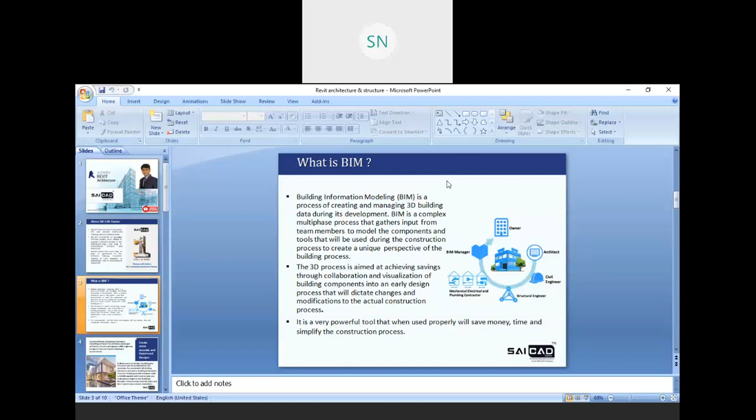And Setu sir, sorry to interrupt you, your screen is not visible. I have shared it. Is it visible, students, or is it not visible to me only? Yeah, now it is visible. Yes, okay, now it is visible, Setu sir. Okay, I have shared it again.

So we are discussing BIM. BIM means Building Information Modeling, right? It actually contains so many - it's a very complex process where so many people are going to work together from different fields. So the process is actually very simple.

Whenever you are going to start your construction project, the first step, as in this image, we have the architectural phase. First we need to create some concept drawings, right? That we can create with the help of AutoCAD. Then the model - that is our architectural model where everything is there with the interior, exterior design, furniture and all, right? Once that model is created, all the data is going to transfer to the next civil engineer.

Then the civil engineer will check the land, right? He will do soil testing, then leveling, and also create a report of the site, right? Then both things - the site report and also the model information - are going to transfer to the next engineer, which is our structural engineer, right?

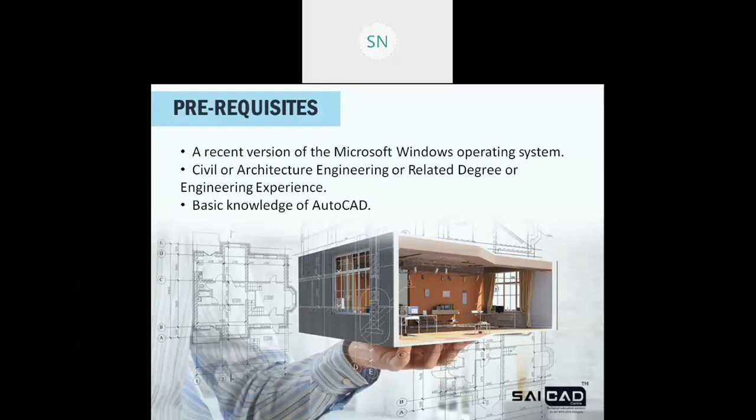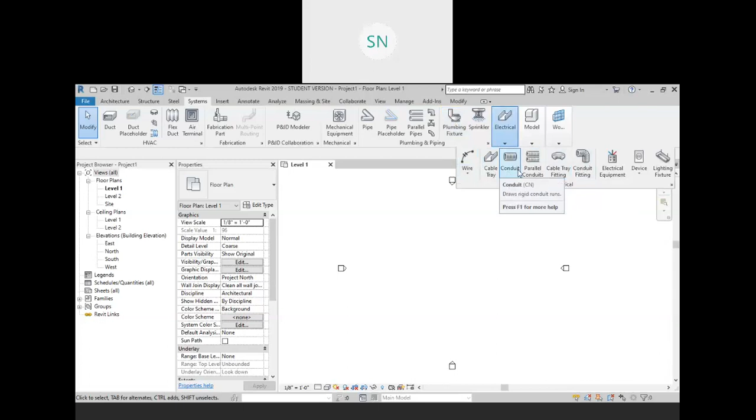One is your supply and return, and the second one is your fire safety system. So these are the sprinklers for the fire safety system, and these are our sanitary equipments, fixtures. Then next we have electrical system where we have wires, cable tray, conduits, and some electrical equipments, devices, and lighting equipments. So this is our MEP system.

But let me close this and continue with the structural analysis default template. So I'm going to use this template, and we will create one structure with the help of grid lines.

So whenever we create a grid line, why do we create grid lines? For proper column placement, right? So first of all I'm going to the south elevation to create a couple of levels.

Let me create levels. Click on the level, choose the pick line tool, and I'm going to create a level at 10 feet offset from here, and one more level at 3 feet offset from below. So these are my levels. You can rename it also - just click on that, and let me say this is my bottom of foundation.

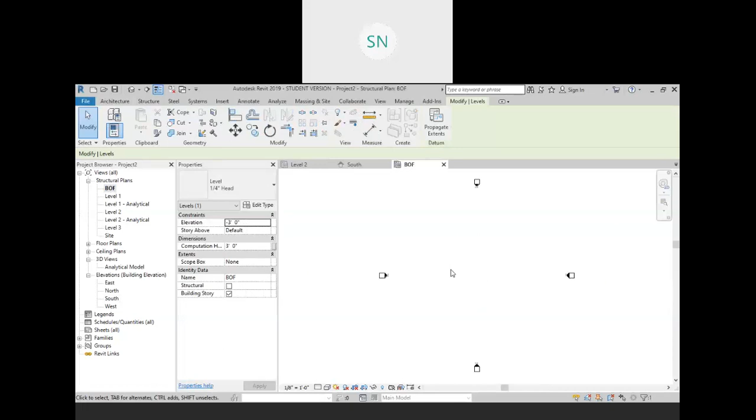And now I want to create a column from my bottom of foundation to a certain height. So I'm going to the bottom of foundation level, and now first we will create grid lines.

So click on the grid line in the datum, and let me create one first. So like level, you can create a grid line also. You must have some basic idea about Revit architecture software, then it will be easier for you to understand this.

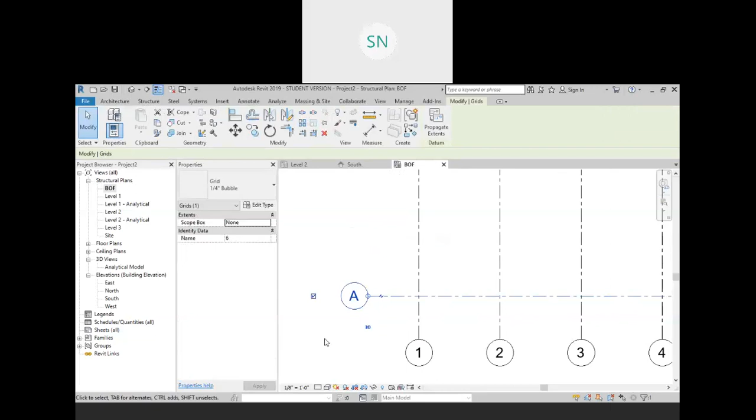Now let me create one more grid line, that is our horizontal one, like this. Before I create an array for that, what I want to do is change the name, type A over there - so this is my alphabetical name. Now I'm going to select it, click on the array tool, and on the other side the gap I want is 10 feet, and the number of copies I want is 6.

So these are the grids we have. Now just adjust this thing - ungroup, set it properly so everything is clear, and try to keep everything in the center.

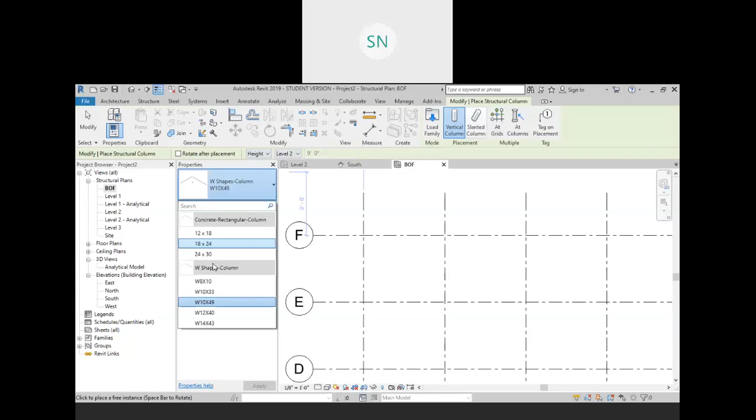Okay, now how to place a column. For the column placement we have a couple of options in this software. Go to the column and see, these are the options we have: vertical, slant, at column, also we have grid. So once you are with vertical, choose your height or depth, let's say height up to level 2. So this is my destination, and this is the size - these are the I sections we have.

And I'm going to create it somewhere over here, and see, it's an I section, but it's not clearly visible. So what you need to do is change your detail level to fine, so the cross section will be clearly visible.

Now see, actually you can place your column everywhere - it is not necessary to place it properly over there, but once you have a grid line you can actually snap it. So the snapping will be there. You can directly snap that corner - see, both grid lines are highlighting. Then just click over there and your column will be there.

Also next, before we continue, let me view it from the 3D. So these are the two columns we have, right? It's a steel structure column.

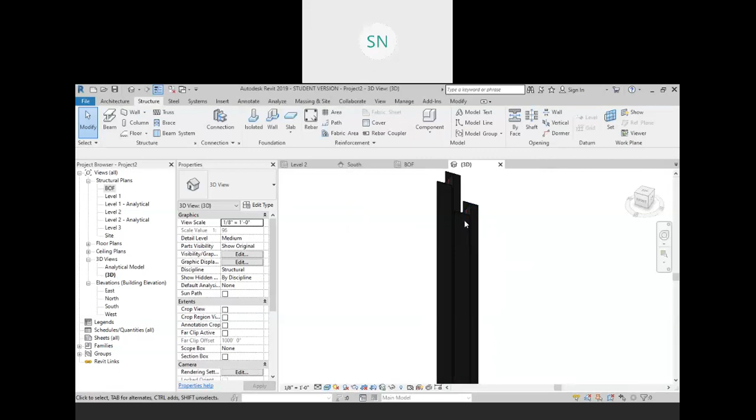Okay, and they are from bottom of foundation to level 2. Go to the south and see, the height of this is from my bottom of foundation to the level 2, right? Also we have slant column.

Let me show you. For example, from level 1 I want to create that. So I am going to create a column. Click on the slant column. The first click I want, the second click on level 2, and first click on level 1, right? So for this slant column you need to create a click twice, your first click and your second click.

So the first click will be on level 1 and the second one will be on level 2. Now this is my first click, so that will be on level 1, and here I am going to click second. So this is my level 2. A column base level offset, top level offset. What is the error? Okay, that is not created.

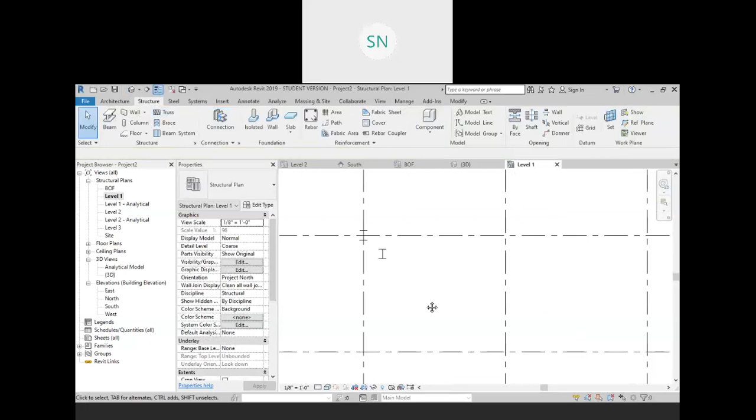No problem. We will create over here column, slant column from level 1 to level 2, first click and the second click, and that is created, right?

Now go to the 3D view and just orbit it. You will notice that it is between your level 1 to level 2, and actually it is a slant column. Go to the south elevation to understand that properly. See, it is from here to here, right?

So these are the column placement options we have. Let me delete them and let me create our structure, RCC structure. For that I am going to the bottom of foundation, and first of all I want to create column. So click on column, choose your size. For example, 18 cross 24 inch I want, right?

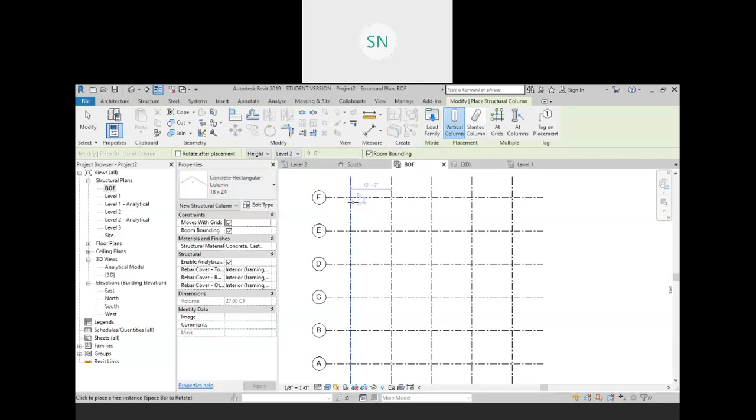Now as I told you, you need to choose your height. Go to the vertical up to level 2, and we have one more option. I want to create multiple columns over here. So click on the at grids and select your grid. It will place columns automatically wherever you have intersection of your grid. See, like this, right? Then just finish it.

So these are the columns we have directly from my bottom of foundation to my level 2, right? So actually we create an entire array of this.

Now for example, a couple of columns I want to take it up to the level 3. So let's have a look which are the columns we want. So I want to take these columns and also these columns. So this much columns I want to take up to level 3. So the top level should be 3. Click on apply.

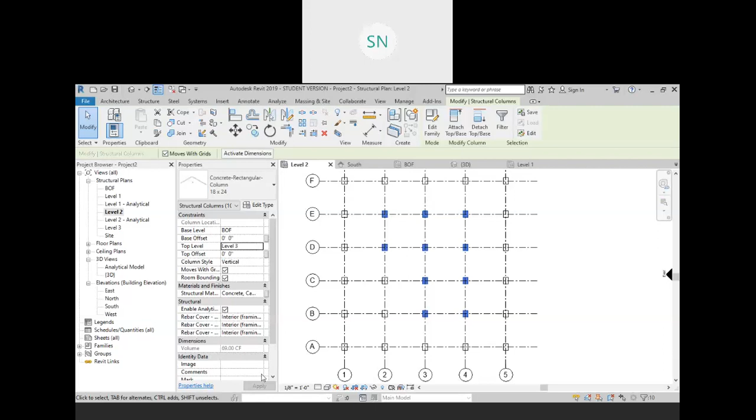And now go to the 3D view. Now see that columns are up to level 3.

Now let me create some beams for that. So on level 2 I want to create couple of beams. So just go to the beam, choose your size. If you want to create your custom one, you can, right? For example, I want to create it.

Click on the duplicate, and I want a 15 by 24. Then hit OK, and the B value should be 1 feet 3 inches, and the height should be 2 feet, which is fine. Okay, so this is my new beam, and let me create that from here to here.

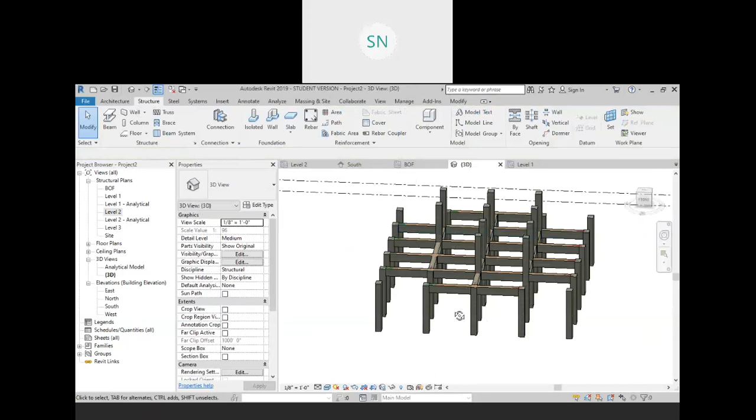You can do copy paste also if you want. Okay, so we create this much beams for our structure. Go to the 3D view. See, these are the connections we have created.

Same for the top. I want to create two vertical and one horizontal over there. So go to the level 3, and here I want to connect beam, I will choose smaller size for now, from here to here, from here to here, and one from here.

Okay, so these are the beams actually are necessary for my structure. So we create that much. Now finish it and go to the 3D. So you get the idea about how to create columns and beams, right? If you go to the analytical model, everything will be in a wireframe mode, right?

So now I'm going to create a floor. So let me create that. Go to the level 2. Here I want to create a floor. So click on the floor, and this is our floor with a metal deck, means it's a steel floor.

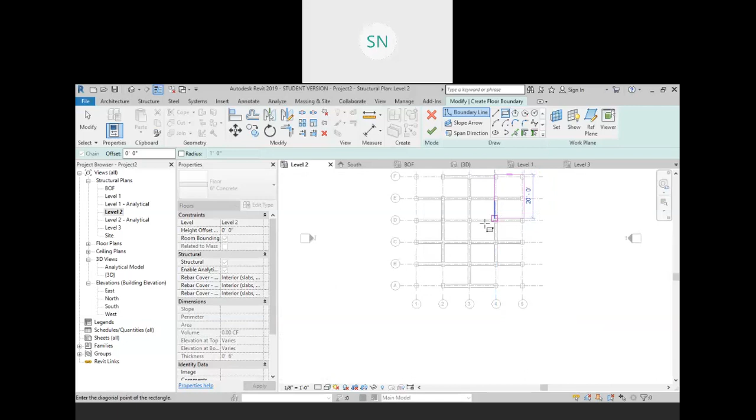I want to create a concrete floor, 6-inch concrete. So click on that, and now create it like this from here to here. Finish that, and this is my 6-inch floor.

We have concrete. Now go to the analytical model. See, we have floor also in the analytical model is mainly used for the wireframe purpose, right? So whenever you are going to analyze your structure, you need this type of analytical model. That 3D model is not useful for the analysis purpose.

This type of wireframe model you need there. So that is your analytical model, but for now it is not useful for us, so just leave it.

Now we will create one more floor on level 3. So again click on the floor, 6-inch. This time I will use this pick line tool, and I want an offset of 5 feet on every side. We will take.

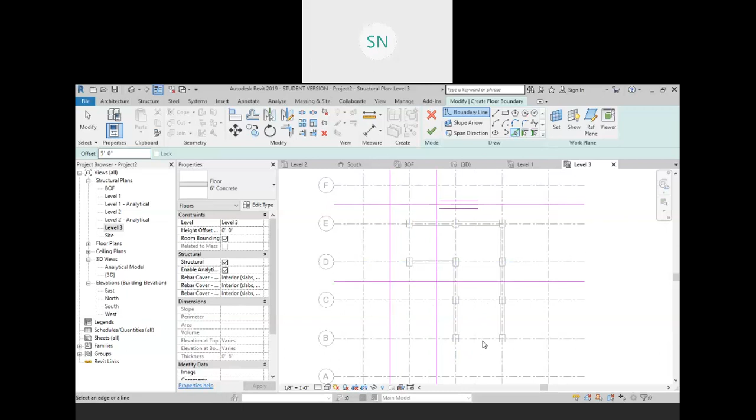Okay, now use this trim corner tool to create corners. Okay, so everything is there.

I want this type of floor. For example, I want to reduce this depth. I don't want this 5 feet, so select it, and here I want only 2 feet. So you can easily modify that.

Also, I want to add some kind of fillet over there. So create a fillet between these two, place it, and now hit on finish.

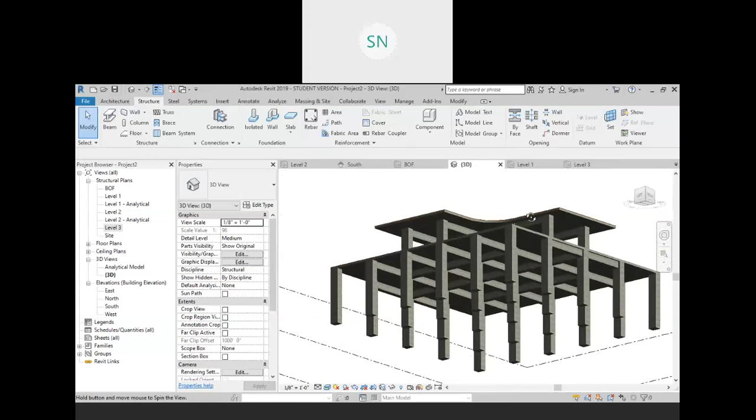So again, this is your new floor on level 3, and this is your structure. For example, you need to create some kind of openings over there for the staircase, you can, so there is no problem. In this way you can create your structure.

Now we will discuss about the RCC wall. For the wall creation, we will create our wall from here to here. So go to level 1, and here we are going to create our wall. Click on the wall structure, and choose your wall whichever size you want.

If you want to create your newer one, click on edit, click on duplicate, and you can provide some new name, right? Go to edit, and here you can change your wall thickness. So in this way you can create your new walls.

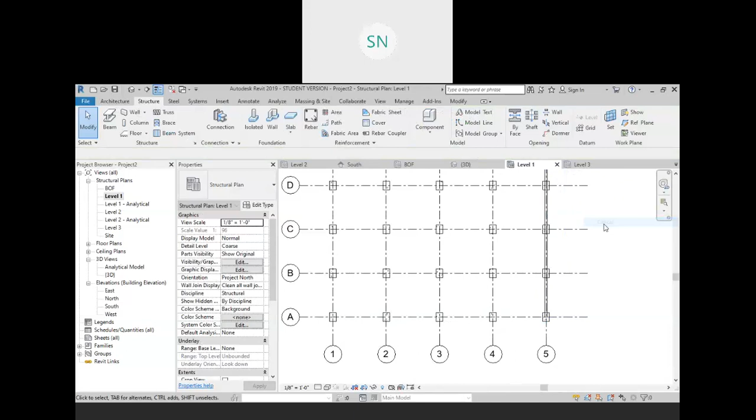Now, where I want to create my wall should be in height up to level 2. I want to create it from here to this point, to this point. So only this much wall I want.

Now go to the 3D view. See, we have these walls from my level 1 to level 2, and this is my wall foundation concrete.

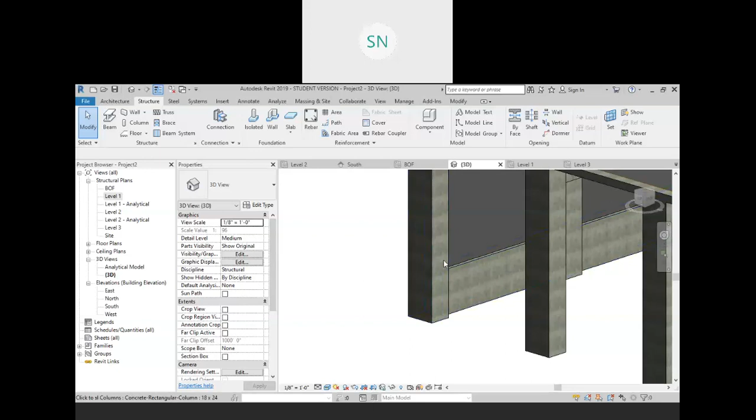Also, if you want to provide isolation footings for that, so that we have, if you like this kind of foundation, that is also fine. And if you want to provide some kind of footing over there, that also we have. In the foundations you will get that, see, wall foundation we have.

Choose your size or just create your custom size. Then what you need to do, just select your wall, and it is going to create a concrete footing over there. Again, on this side I'm going to select this one. So it is that much easy.

Similarly, for example, I want to provide some kind of footing for my this column. So for that we have isolated. Click on the isolated, and these are the footings for the column.

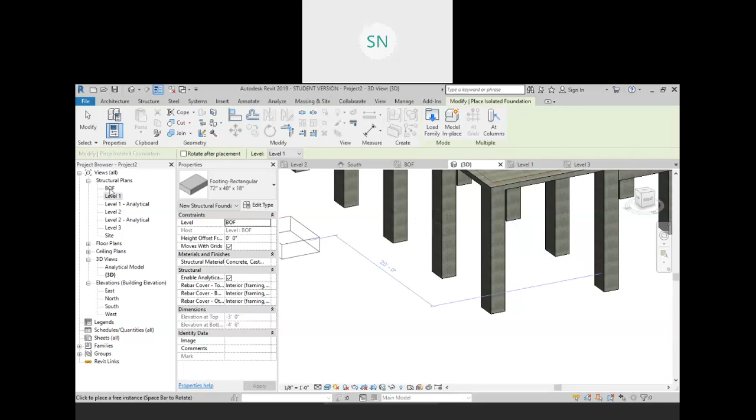This is the simple one, but it will be difficult to place directly from the 3D. So either you can place it from your 2D view, go to your level, or you can use this at columns option. Click on at columns and select your column and click on finish.

Similarly, let me add some new foundations. So also we have in our library, go to the load family, and here in my library, go to the structure foundations, and see, these are the foundations we have pre-created. If we want to create it custom with the help of model in place component, you can, so these are the shapes we have.

So let me use this pile foundation - two, double pile, single pile, triple pile, four pile. So these are the foundations we have. So I want to place it at this column, finish it. This is our pile foundation where we have four piles on the bottom.

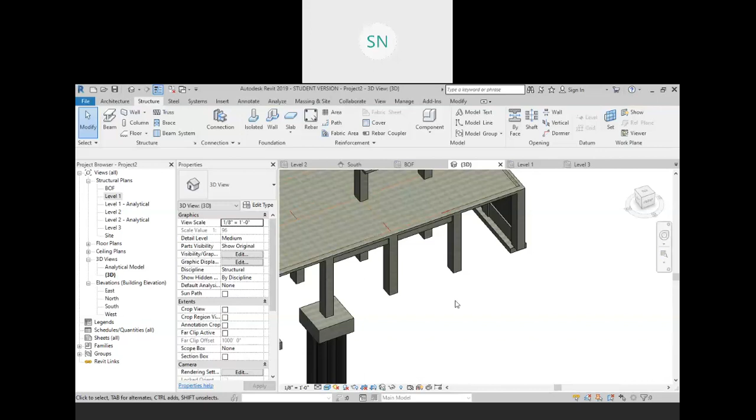Then again isolation, let me add one more. Maximum we have 9 pile over there at column, this one. So these are the foundations we have.

Now select it, go to edit, and here you can change your foundation thickness, your width, your length, and your cutoff. Also clearance we have, and your pile pipe diameter, so 20 mm and 24 mm - these are the two standard diameters we have that you can use. So these are the foundations we have for our column and also for the walls.

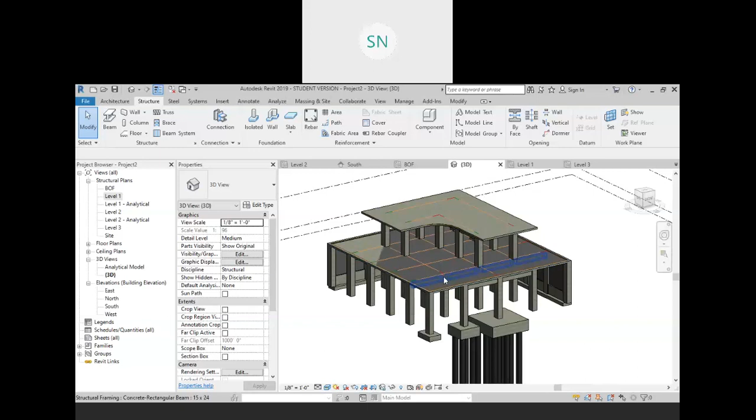So it is clear now, students, how to create your RCC model using our structural modeling tool.

So now we are going to discuss our next tool, that is reinforcement. To provide reinforcement, actually I can create it here also, but it will be difficult for you to use the other file formats. This is our US file format, right?

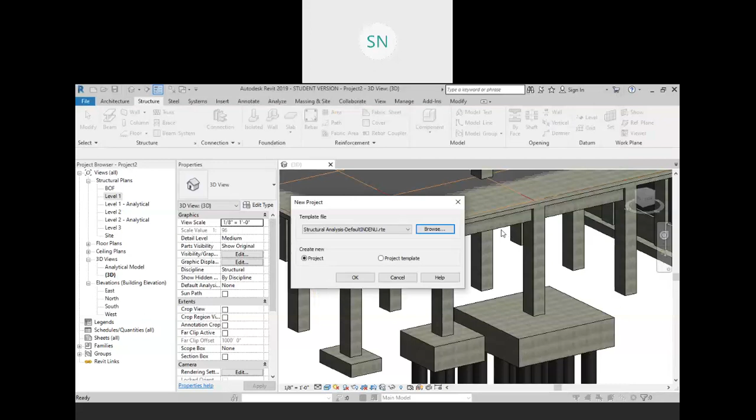So let's create our Indian file format for now. I'm going to close this file for a while and take a new file, this time an Indian file format template. See this one, structural analysis default Indian. So this is our structure analysis template, and now we will discuss reinforcement.

The reinforcement process is quite simple. You only need to understand the fundamentals. First of all, let me create a couple of grid lines over here: 1, 2, 3. So I'm just creating a very simple model which we want to use. Only that much I'm going to create.

This should be equal. This should be 7,000 mm.

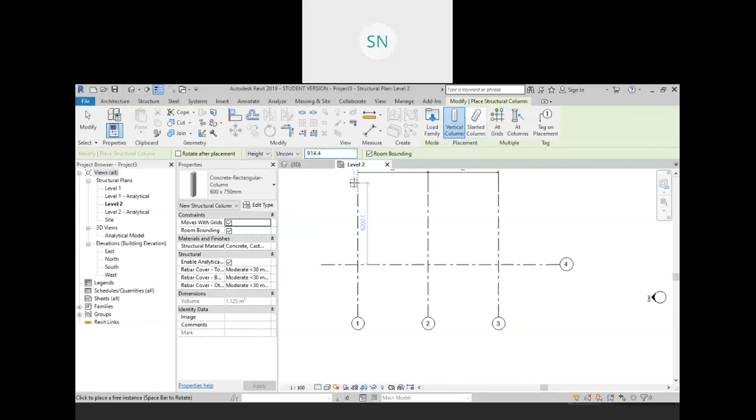For now, let me create a concrete column. This much size we have, height up to level 2, and I want an offset of 3 feet. So the file is in metric, but I can provide values in feet and inch also, because this is a parametric software. Select it and click on finish.

Add footing also. I am going to use this one, the same. Let me increase the depth, foundation thickness 600. Okay, now at columns, select these columns and hit finish.

Okay, so we created this much. Now go to level 2 and here we will create beams. Click on the beam and choose the concrete size 400 by 800, which is fine, from here to here.

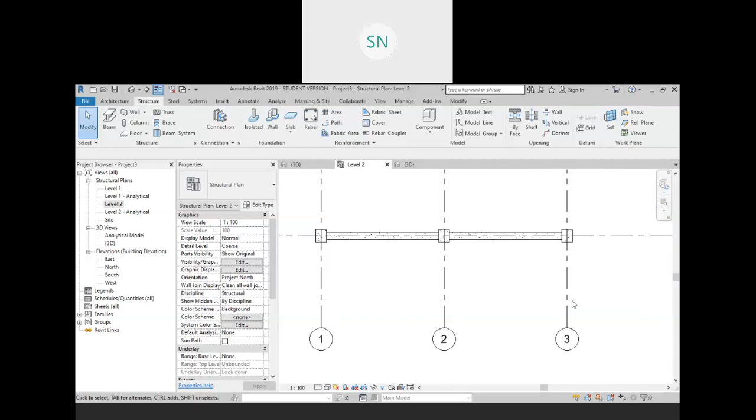So for this much structure I am going to create reinforcement for now, so you will get the exact idea how to create reinforcement for our entire model. And for the reinforcement you need to understand a couple of things. First of all, I am going to create sections over here.

Click on the section view and I am going to create one section right from the center, this one horizontal. So actually we can cut these columns and beams together and we can view from this side - it will be visible. Also one more section I am going to create. Click on the section like this, vertical one - this is because I want to view the cross section of this beam. That is why I have created this one section.

Now the first thing, we will go to this section, and this is our structure. Let me create it to detail level. Okay, so the first thing we have is how to provide cover.

So cover will always be there in your concrete model, whenever you are creating an object with the help of concrete, either beam or column. So cover will be there. Just click on that and see this dotted green line we have - that is our cover.

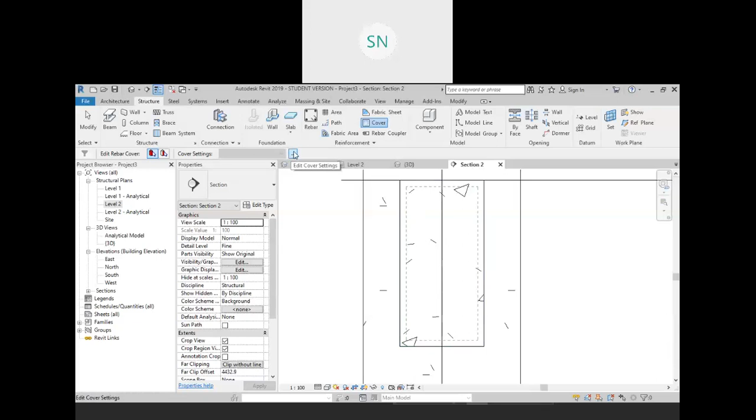And if you want to change that, just go to these three dotted icons we have, that is edit cover setting. And here you need to create your cover first. So for example, I am going to create my new cover - I want to take 100 mm. So this is my rebar cover one, and the thickness I have chosen is 100 mm. Now hit OK.

Now how to apply them? To apply them, we have two options. First one is we can apply to the entire object, meaning I want to apply it to the entire beam or entire column like this - this one is the pick element option. Select this one, and I want to change my cover, for example 75 - see, the cover is updated. For example, I want to provide only 20 mm, so the cover is again updated.

Inside your cover, your steel will be there. This much offset we have for the steel placement from my final finish boundary. So that is known as cover.

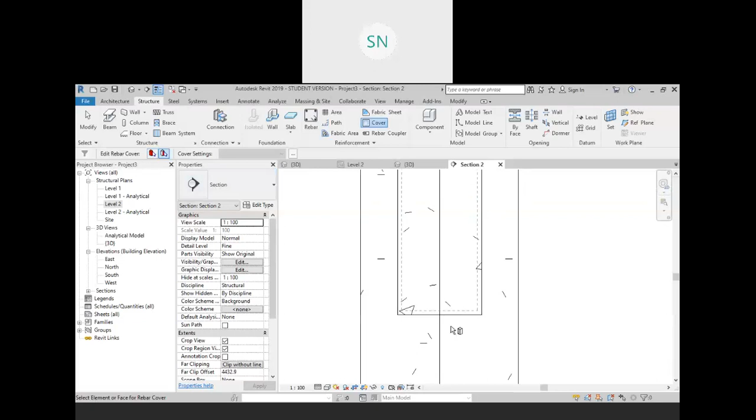Now the second option we have is to click on the cover. This is the pick face only option. For example, I have provided 20 mm cover only, which is too low, but from the bottom I want to provide 100 mm only.

So what you need to do is use this pick face option and choose the bottom edge only. I will use this one that we have created, 100 mm. See, on every side we have 20 mm, but over here we have 100 mm. In this way you can provide your cover, and based on this cover your reinforcement will be there.

Now I cannot place my reinforcement up to this point, because it's outside the cover. Revit software won't allow you to create your reinforcement. Now how to create that reinforcement? For that we have this rebar option. Click on the rebar, and these are the shapes you will get.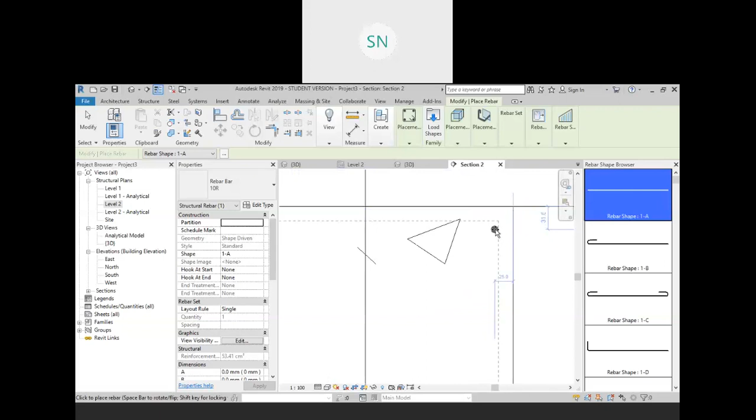Now if you want to change the position, go to the placement options, and we have three options there. First is parallel to work plane, meaning it will be parallel. Second is parallel to cover, and the third is perpendicular to cover. Let me try them - perpendicular to cover, and yes, now see, I have a complete round bar. That means it is straight to my beam.

So now what I want to do, I can place my bar over here, only inside my cover. If you go outside, the preview will not be there. Same from the bottom - this is the function of cover.

Now here we have sizes. I want to place 20 mm size, so this is the 20 mm diameter, and I want to place 2 or 3 copies. Click on fixed number, 3 copies like this, and on the bottom one more, but I want to change it to 4 copies.

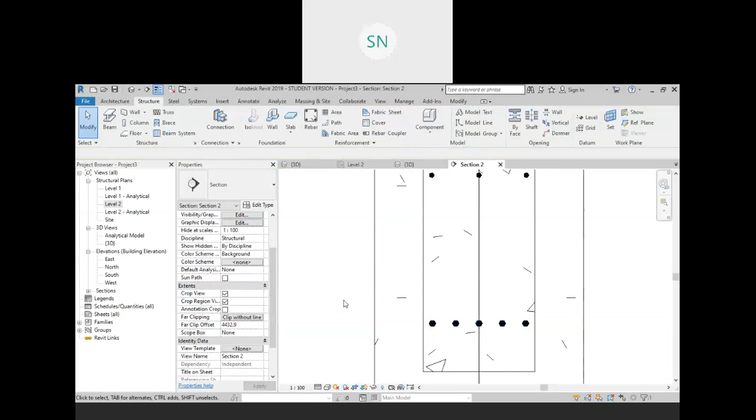Click on the rebar. Here we have a quantity, just increase it to 4, 5, whatever you want. You can also change your size afterward - on the bottom we have 25 mm diameter. Now select it and use your arrow keys to set the position, lowermost and topmost, like this.

Now go to the 3D view to view that thing. See, in 3D these are the placements. Now what I want to do, I'm going to select it.

See, it is not visible in your realistic mode. Convert it to realistic - see, it is like this, you cannot view your reinforcement.

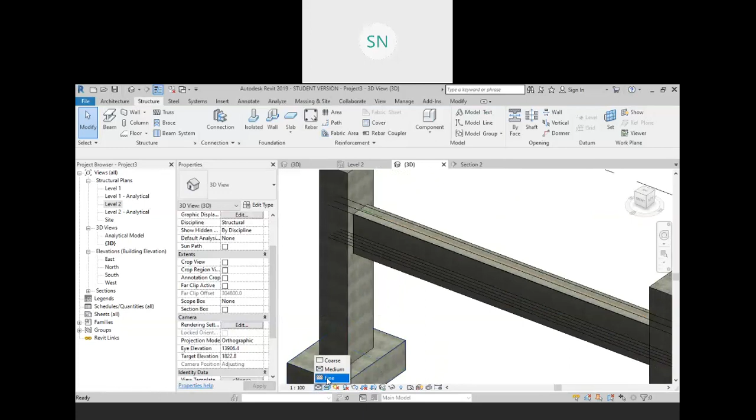So if you want to view that, just select it like this, and go to view visibility and turn on your visibility for 3D views. Hit OK. Now see, in realistic mode also that will be visible, but still it's like a line, like a wire. So change your detail level to fine, so the complete cross section will be visible.

Now in many structures you will get so many types of options. For example, in many beams and columns you will find elements that begin from the top, because we have tension zone on the top. Then at the middle way it switches to the bottom, then continues, then again switches to the top, and continues. This type of member you have seen in so many reinforcement processes, so that type we can also place.

So for that, let me go to section view 1. This is my front view section, and here I want to place that member over here. So do one thing - go to the rebar and find that type of shape.

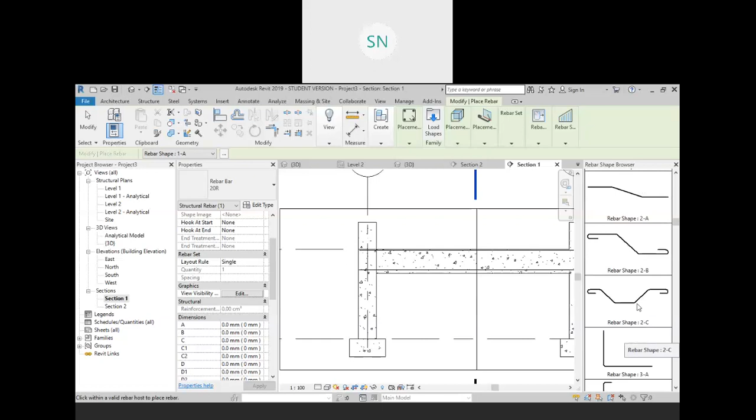So here we have that type 2C, right? It is almost like that. Just click on that, and now in the view it is not proper. So change your placement position. Now it is comfortable. Just click over there and finish it. Again go to the 3D view.

Every time you do any kind of modification, you need to again do this thing. Just select it, filter it, your structural rebar, apply, OK, and you need to change your visibility, turn on that. So every time whatever new things you are going to create, you need to do this, right?

So for now, what I'm going to tell you, I will use wireframe mode only. In wireframe mode, it will be clearly visible, right? So now just select it and convert it into fixed number. For example, I want two numbers.

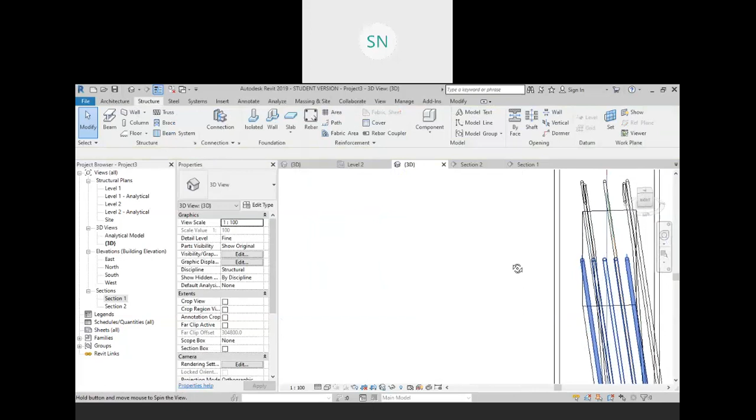Okay, now what we want to do, we need to provide some tie reinforcement over here. The size for this one is 20R, which is fine. Okay.

So for the tie reinforcement, I am going to enter section view, and here click on the rebar and find your tie reinforcement rebar. So these are the shapes we have. This one we will use for now.

Click on that, and the placement was wrong. It is actually all around, so we will use perpendicular to cover for that. This is right. Now instead of fixed number, we will use maximum spacing over here, right?

With the help of maximum spacing, for example, maximum spacing I want 150 mm is my maximum spacing, right? Now just go to your boundary and click. So all your rebars will be placed.

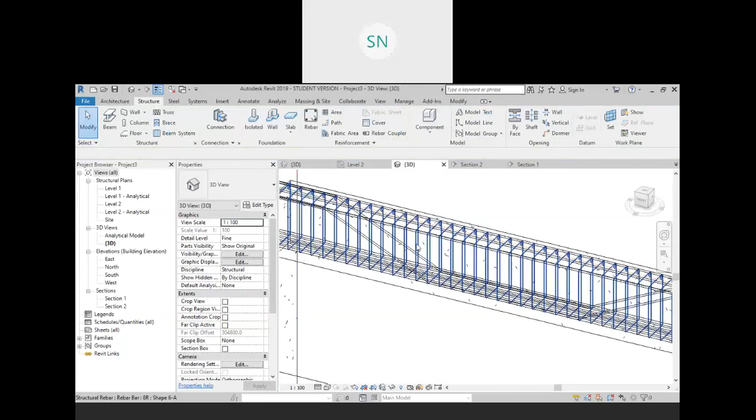Now click that and change it to the minimum size 8 mm thickness. Go to the 3D view again, not this one, this one. Okay, so now they all are visible properly. You can view it from the realistic mode also, right?

Okay, now the next thing I want to do, I want to transfer this entire reinforcement to the next beam also, right? Over here. So you can do one thing, just a minute.

Okay, so now I want to do a mirror, right? We cannot copy it because it will give you some kind of error. So let me go to section 1, and I'm going to select these things. Only the reinforcement will be there. Okay, now click on the mirror with pick axis.

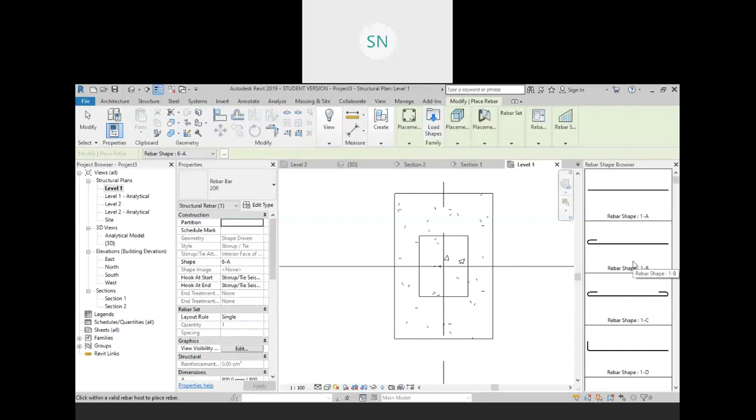And for example, fixed number 5 quantities I want, and it should be parallel to cover. Cover is there, so why the reinforcement is not visible?

Okay, no problem. So if you find this type of problem, let me try it from level 2. Sometimes you will get this type of problem. Okay, from level 2 it is fine. See,

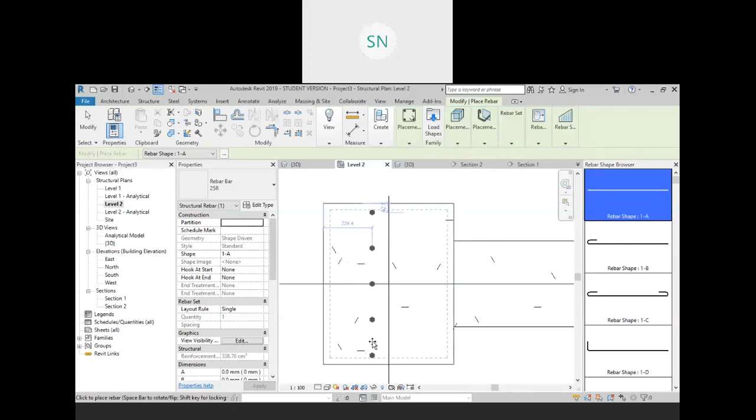so we want like this. Click on the fixed number 5 quantities, 1 2 3 4. Okay, and just select it and transfer it to the 2.

This one is also 2, and select this series, take it to the right, and this one we will take to the left.

Okay, so these are our main reinforcement. Now for the tie reinforcement we will go to this section view, and we will create rebars.

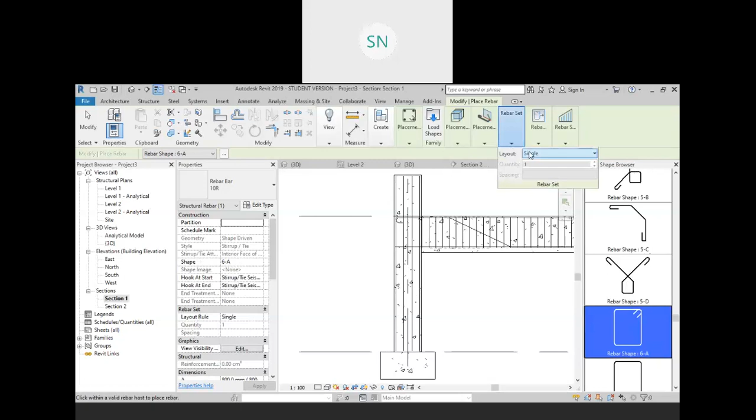We will use a 10 mm diameter, and the shape is this one. Where is that? Here, and the placement is perpendicular to cover, and here we need maximum spacing 100 mm. Click,

and that's it. Now go to the 3D view and select this one, filter it, so this is the structure we have created for the column.

And till now, if you are going to change your cover size, for example I am going to level 2, and I am going to change my cover for this element from this one, then you are not.

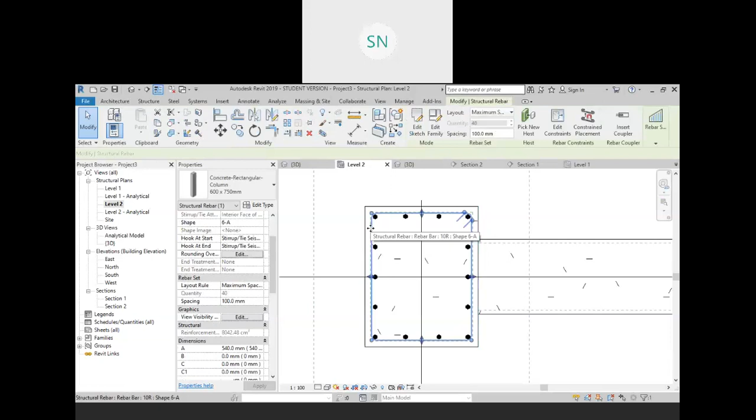So first you need to decide your cover, right? Now we need to copy it. Go to the section. Here I am going to select this much, filter it, and now click on copy multiple, from here to here to here. So this is the reinforcement.

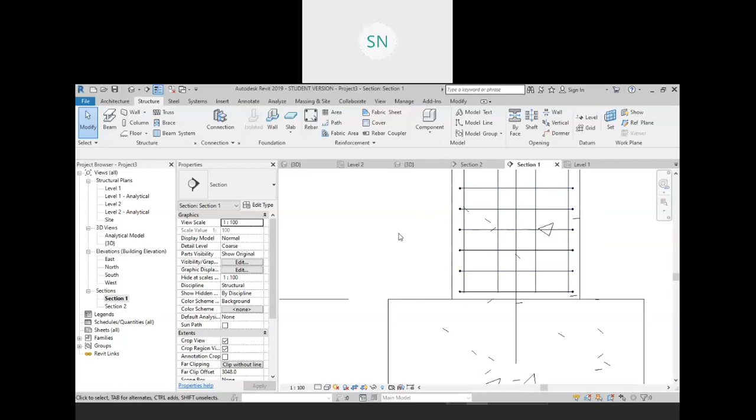Now here I am going to show you one more thing. If you want to create some special reinforcement like sketch rebar, some custom shapes, for example I want to create a connection between my footing and my column. So I want some members to connect it, like this. For that, we will create a rebar, and now you need to choose sketch rebar over here. Click on sketch rebar and choose your element column. So column is my reference, and now I'm going to sketch my rebar.

So this one, from here to here. This thing I want to do, and the size should be 25R. Okay, and hit finish. Now select this one and view it from the 3D, so you will get the idea.

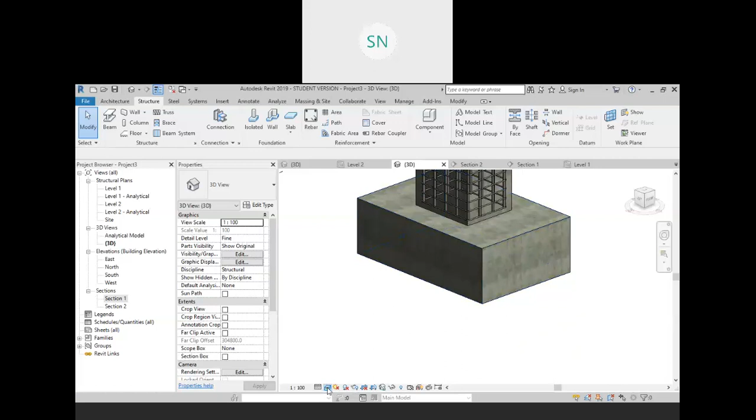So we have that member over here. Now select it and go to fixed number, and I want 8 copies. Okay, these are the copies we have. Now what we will do, we'll create a mirror. Select it, take a mirror with pick axis, this one. So we have that on both sides.

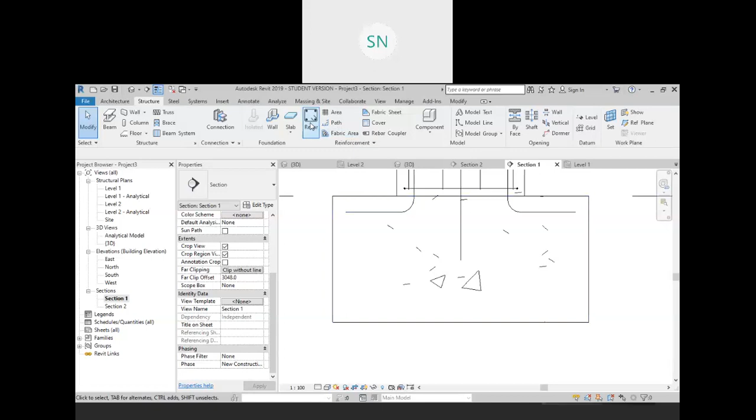Similarly, the reinforcement you can perform for the foundation also. So for example, on this foundation, I want to use my regular section members. This one I want to use. So like that, change your placement to parallel. Not this one, this is not fine. So let's have a look at this one, which is okay.

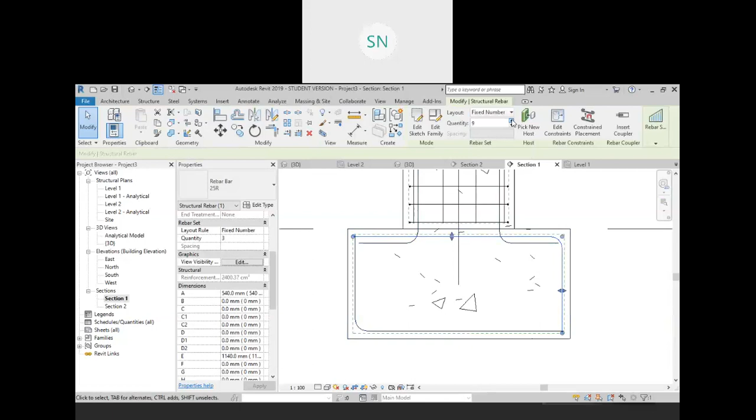So we are going to use this one, and one over here, and select that, fixed number 10 copies. Select this, fixed number 10 copies.

This we have done. Now from the top we will add some more, or from the side view we will add. So what we will do, we go to level 2 and take this section over here. Alright, so we can view that section of the footing. Now go to that section and the foundation is visible.

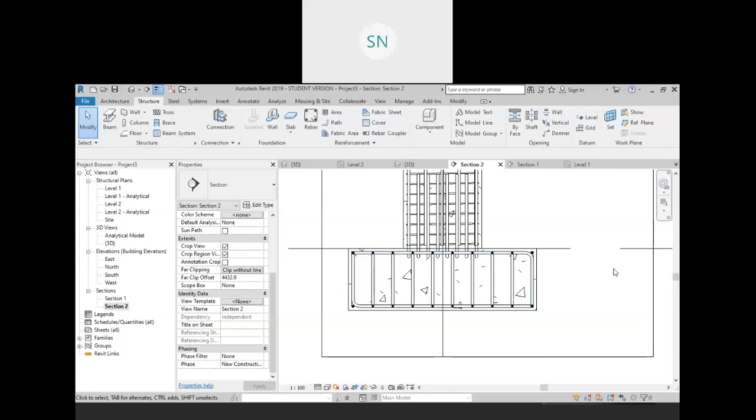Now we will add the same rebars here and there, and in this side select it, fixed number 8 copies, this one fixed number 8 copies. Now if you want to place some tie reinforcement, 2 or 3 rings over here, that you also can. Again rebar, this one which is perpendicular to cover, parallel to cover. The size should be 12R, and here we will take maximum spacing of 50 mm, like this.

So we did the reinforcement for the foundation also. Now select your entire model. Before we select it, let me create a copy to every footing. So I am going to enter in this section, select this, filter, and take a copy multiple, for example from this corner to this corner to this one.

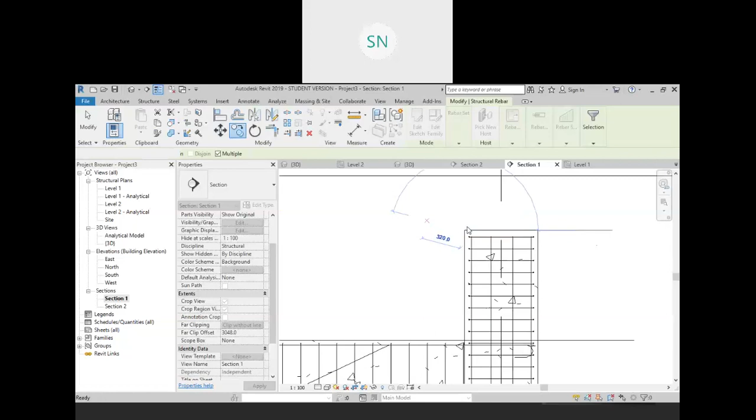Okay, now just go to the 3D view and select this all. Click on filter, check none, just choose rebars, and then turn the visibility on. Now view it in the realistic mode. See the reinforcement we have created for our structure.

So I hope how to provide the reinforcement, this thing is clear now, students. Then next we have reinforcement flow for the floors and for the walls also. And that's a quite easy thing. So let me discuss that quickly.

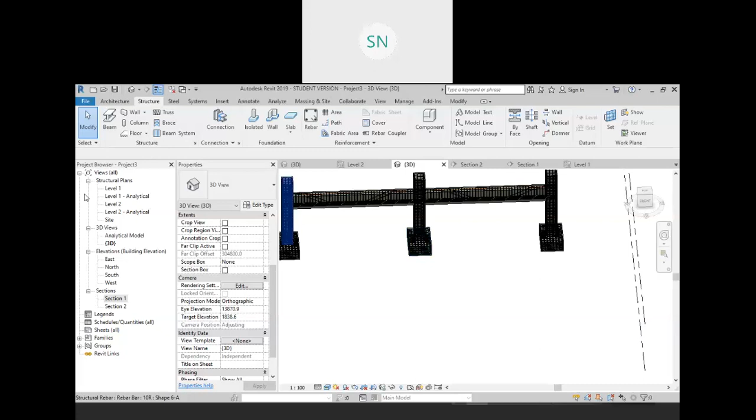So for example, I'm creating one floor over here. Click on the floor, concrete floor, this much, right? Now finish it.

Now in this floor, for example, I want to provide a reinforcement. So for that you can use this area reinforcement. Click on area reinforcement, select your object. Now you need to draw a rectangle from where you want to begin and where you want to add. Now this is the direction of your main reinforcement. If you want to change, you can use this, that this is my main reinforcement direction. Then hit OK.

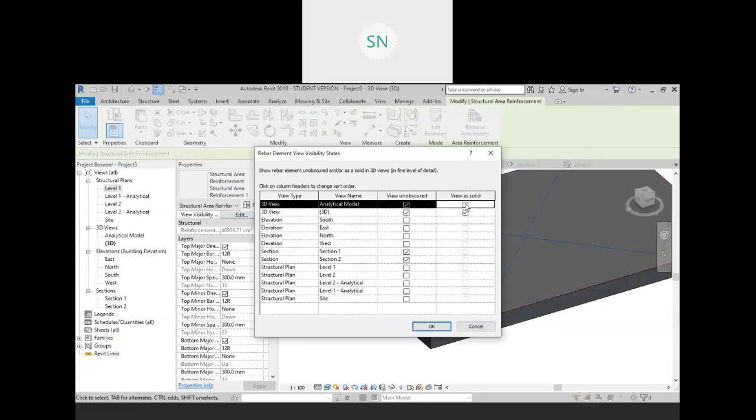And again you need to change the visibility graphics. See, this is your reinforcement, but you will get the top reinforcement and the bottom reinforcement. So this is the standard format. For the wall also the same thing works, and for the floor also same thing works.

Now we have a setting for that. See, just select this reinforcement like this, and see we have everything. The top major direction you want, click on apply. If you don't want, then the size for the top major direction, right, then the minor one top.

So for example, I don't want the top grid, click on apply. So now we have only bottom grid. Now I want to change the bottom major size to 14 mm and the bottom minor size to 8 mm.

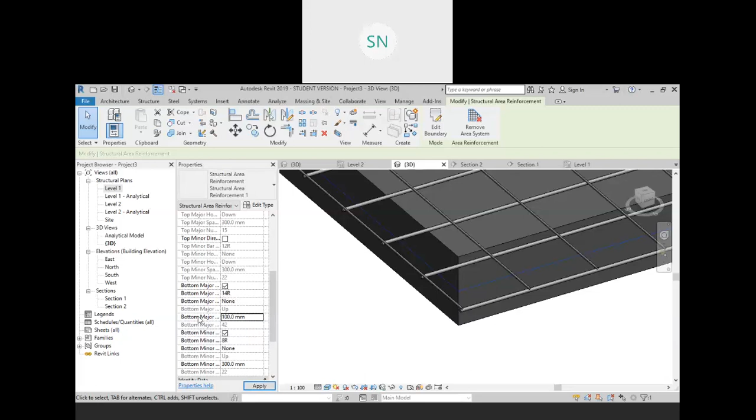Now I want to change the gap. The major grid should be 100 mm gap, and minor also should be 100 mm apart from each other. So my grid is a little dense. So this is my reinforcement for the floor.

Also, if you want to add an anchor bar, for example at the major grid I want a hook at 90 degrees, so we'll directly get the hook, right? If you want a 180-degree hook, you will get directly like this. So these are for the connection of your floor to the beam.

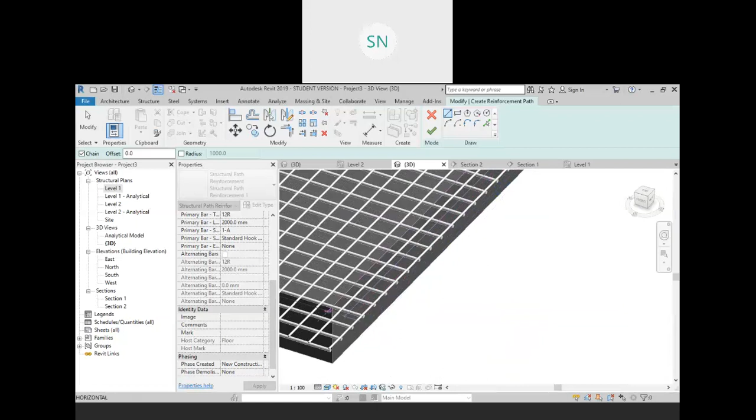If you want to add them manually, you can just click on the rebar, not the rebar — for that we have path reinforcement. Click on the path reinforcement, select your element, and I'm going to create a path, for example from here to here, to this point, right? So this is my path reinforcement. Now finish it, select it, and in the visibility — where is the visibility?

So this is our connections, right? For the path reinforcement, let me set the gap. For example, I want every 50 mm, so it is denser.

Also standard hook, 180-degree hook we have, right? And also none means straight members you will get. Primary bars, alternate bars options we also have, right? So these are the reinforcement thing. I hope it is clear now to you all students, right?

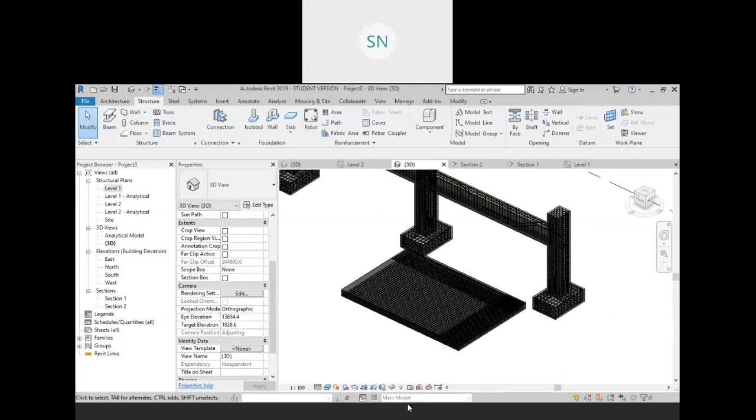Yes. Now see, the last topic of the day we have, that is steel structure design. We have a couple of minutes now, so let me discuss that also.

For example, I'm going to delete this one. Go to level 1, and here I'm going to delete this section also. So one more grid line — please focus over here, students. I will discuss this module quickly.

So the steel structure is also same as the RCC structure, but there you won't need to provide any kind of reinforcement, right? Because it's a completely steel geometry. Click on array, on this direction let me took 6000, enter, and 5 copies, enter.

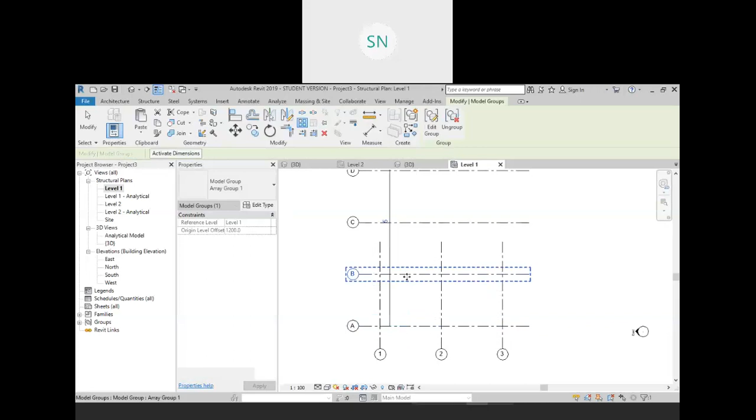I'm going to select this, take it down. Okay. So let me create first of all columns over here.

So for the steel structure, just use the same tool, but you need to use your steel element. So I'm using ISMB 300. Height should be connected to level 2, and let me have the at grids option over here. Click on finish — so these are the placements we have done. Now go to the 3D view and see, these are the columns we have, the I-section columns.

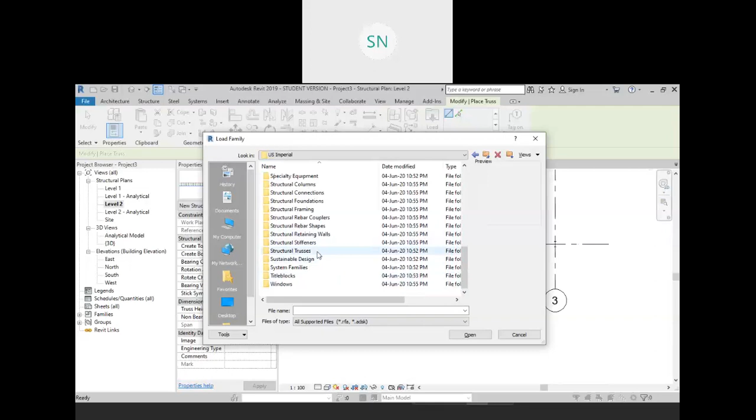Now let me create some trusses. So directly go to level 2, and I want to create one truss over here. Click on the truss, and which type of truss you want? Go to the load family, and you will find so many options for the truss in your structural trusses folder. So this is the truss, this R1, this one also we have, right? So many sizes and shapes we have.

Let's choose one of them, for example this one. Click on open, and I'm going to create it from here to here. Now finish it, change your visibility to fine. Go to the 3D view, and it's concrete — see, so these are the mistakes we have, right?

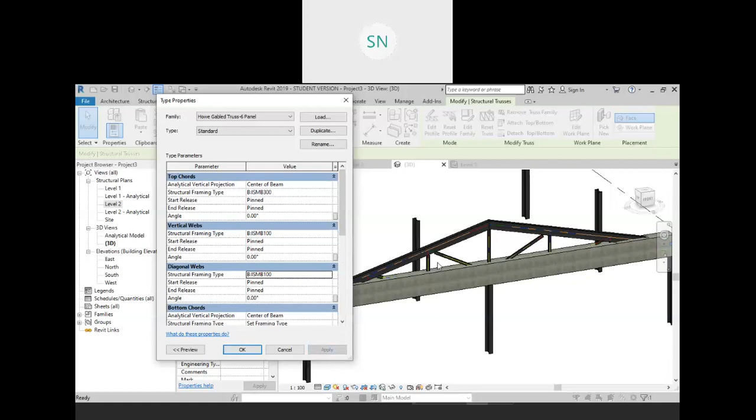Now let's do one thing. Go to level 2, and I'm going to select this truss and click on copy multiple, from here to here, here, here, and here, right? So up to this point we did a copy, but let me create the roof also.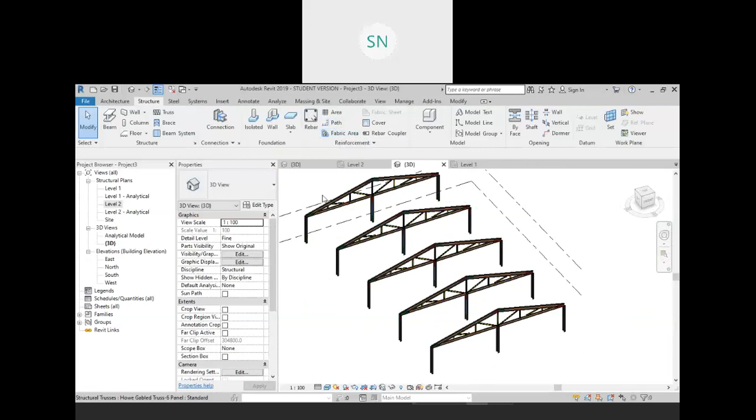So for the roof you can use a roof tool, right? Or if you want to create a metal deck over there, then you need to use a floor tool. So click on the floor, and here you will get a metal deck for that. So we have a 75 metal deck floor, right? Now I'm going to use a pick line tool, and I want a 500 offset from all sides, so from here, there, here, and there. Now create a corner, right?

Now finish it, and this is your floor. Which one is the metal deck we have? But we need to incline that. So for that, we need to measure the height, that is 1800, and the height of this bar, which is 300.

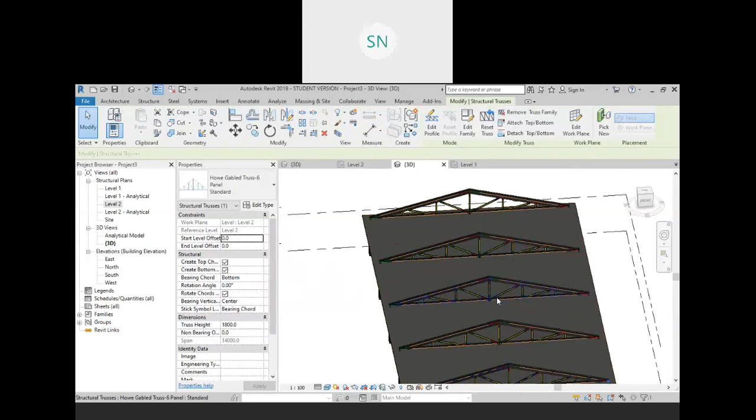So the total we will add 600, right? So click on this floor, and here I am going to create one split by line from this midpoint to this midpoint, and I want to provide an offset for that. Modify sub element and 2000, hit enter.

Also I want to modify this edge to 100, this one 100. Okay, now this is your analytical floor, right? So let me change the visibility of analytical to the visibility graphics, analytical floor, turn that off, apply, and OK.

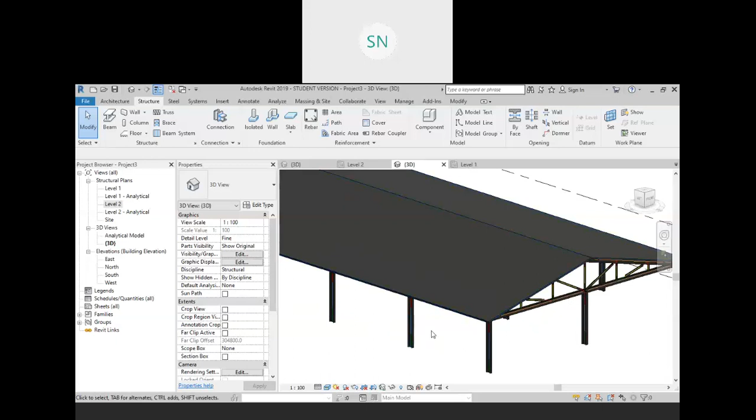So this shade we create, but whenever we experience a wind force, this shade is going to break, because there is no connection between these columns. So for that we need to introduce braces between these columns. So for that, go to your level 1 and let me create one brace between these two columns. So here I am going to explain you one.

So let me create a brace. Brace means a slant member. So 300 mm above from level 1 and minus 300 mm below from level 2. So first click, second click. Now what I want to create, I want to create this ISRO round shape. So for example, this is my first click and this is my second click. Now finish it and go to the 3D view.

So we add a pipe over here. This is a round pipe, right? Now how to add connections in the steel structure? See, you need to understand this thing, how to add the connections between your steel structure, right? So for that, just a minute.

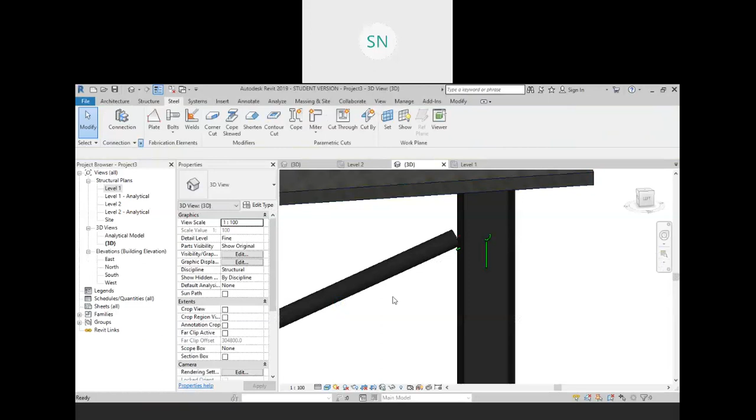So here we are going to click on the connection and select both and hit enter, and it will give you a connection. But when you see in the properties of your connection, there will be nothing inside, because we need to load these connections from the library. There is nothing over here. So what we need to do, go to the connection drop down over here, and in that dialog box, you will find these are the connections we have. So I'm going to select all, then add it, then hit OK.

Now you need to find your appropriate connection for your junction. So for example, I am going to select this connection again and go to here, and you will find all the types of connections, right? Pipe, weld and fittings also we have. You can use this one. See, the result will be like this.

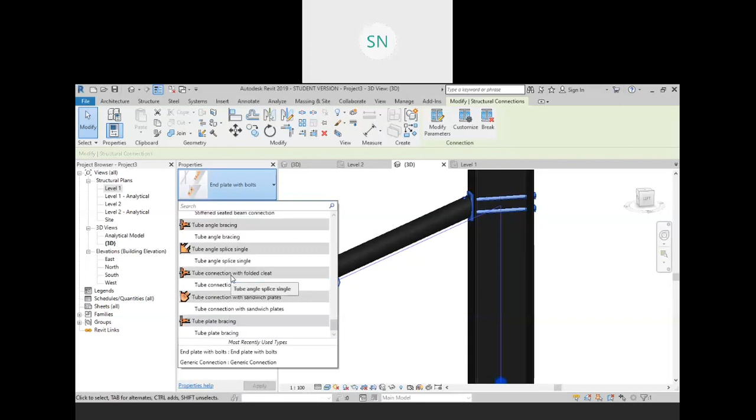So a plate is welded to this shaft and it is bolted with the plate, but we don't want that. The proper connection for this round pipe we have, yes, here we have tube connections. So this is your tube angle bracing, right?

So it will be a plate which is welded and it is going to bolting, and this is the junction. Again, let's have the next option. So this is again fine, but little confusing, because the L section is quite small and these are the bolting which is outside that. Why this thing? Okay, no problem. Select it and take a new one.

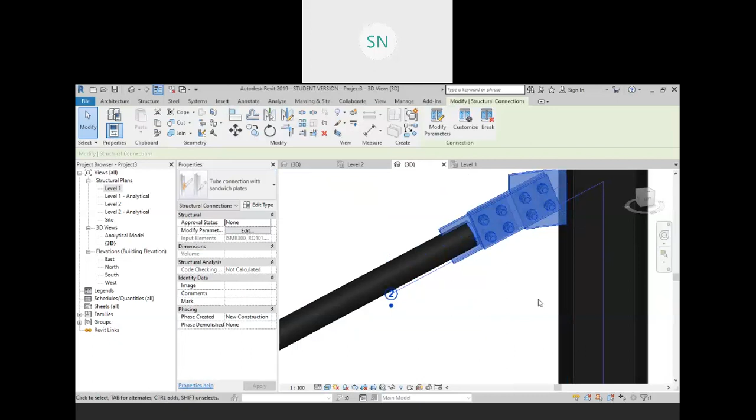I think this one is fine. So same thing we will apply over here also. Click on the connection, select both, hit enter, and choose the same one, connection with sandwich plates. So this plate is welded here and this plate is welded here. See this cross sign you will get, it is a welding symbol.

Similarly, you can provide your connection at the end of your column also. If you want to create a manual plate, you can create a plate, you can provide bolts also, but I just prefer to place connections. So for example, I have placed a connection at the open end. So here you can provide an end plate like this. There are so many end plates we have.

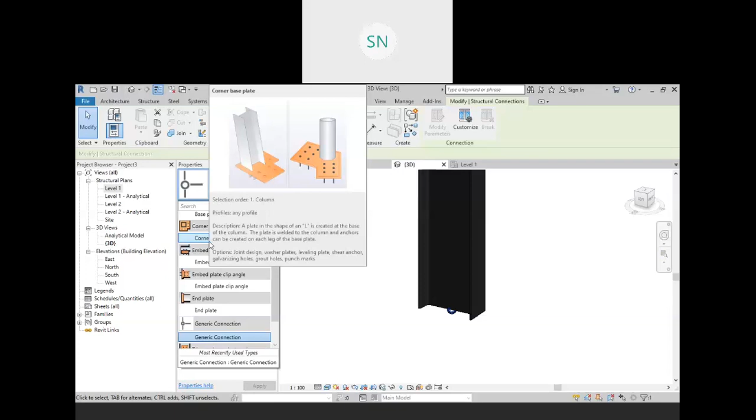Base plate got. Okay, so this one is fine, I think. Base plate. So click on the base plate, and it is not necessary to use just whatever we have, right? We can modify that also. So I'm going to select this base plate, click on the modify parameter, and here we have a plate thickness. See the number 1 in the diagram.

Then plate dimensions, let's have an offset of 150. Then okay, so this side is increased. Let we take 200. Okay, now plate corners, if you want to add some kind of convex or fillet or cut or anything. So we add convex means fillet. The length is 50 mm.

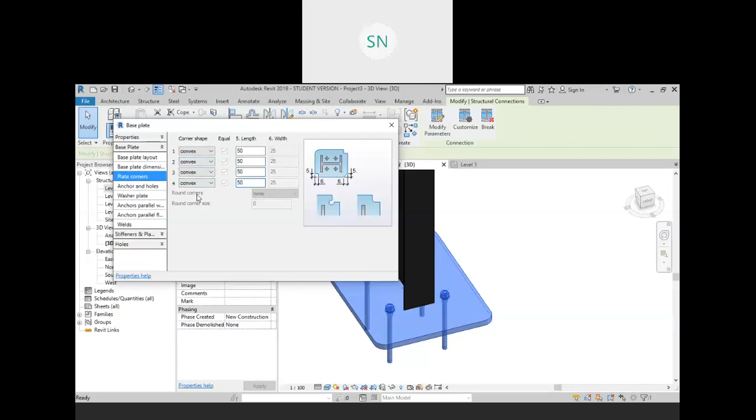The grade, then also the shape, I want J shape, right? Like this, because this is my foundation. The length, little wide, okay. Then the rest parameter we want have over here.

So go to the washer plate. If you want to add that, click that. So you will get a washer plate below your nut. Okay, that is also fine for the vibration purpose.

Now this is the position of your bolt. Let's say 350. No, we want that 200. Okay, now this should be 400. It is outside 500. Okay.

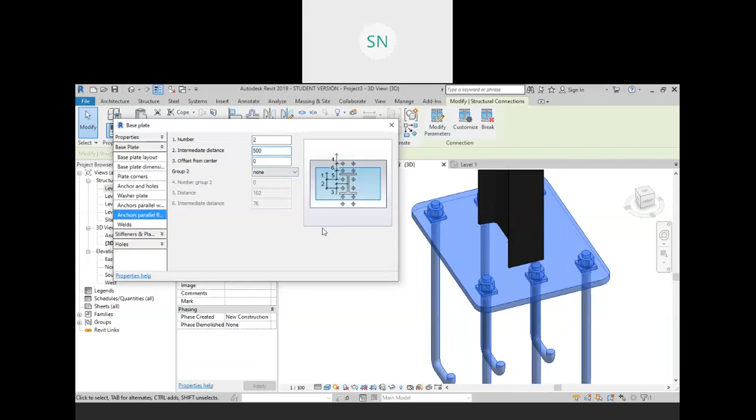Weldings are also okay. Now hit OK. So in this way actually you can create your custom connections. Here we have welding, see this plus sign we have, that is our welding, right? So I hope you all get the exact idea about today's class.